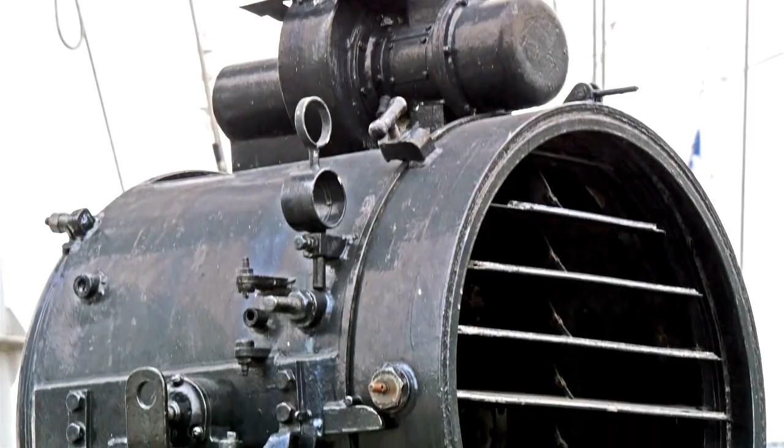Elon Musk just announced one of the most audacious industrial goals in human history, and no, it's not colonizing Mars, at least not directly. SpaceX is aiming to build 115 Raptor 3 engines every single day. That's 3,500 a month. A staggering 42,000 engines per year. Take a moment and let that sink in.

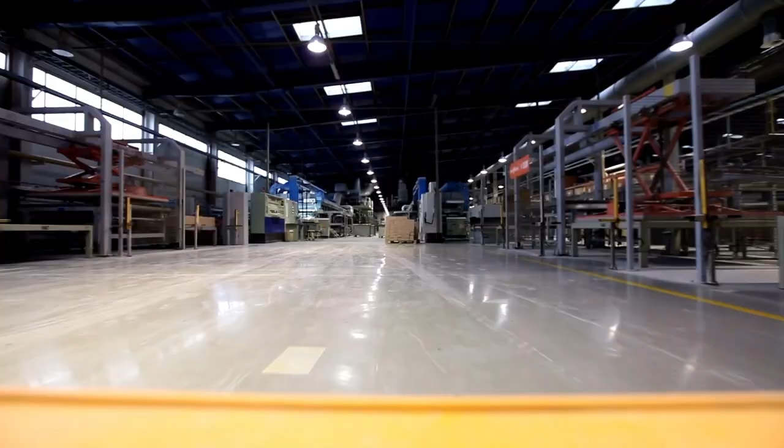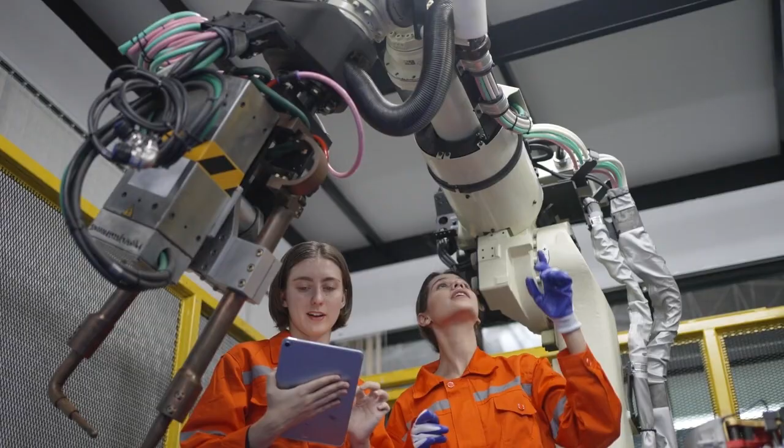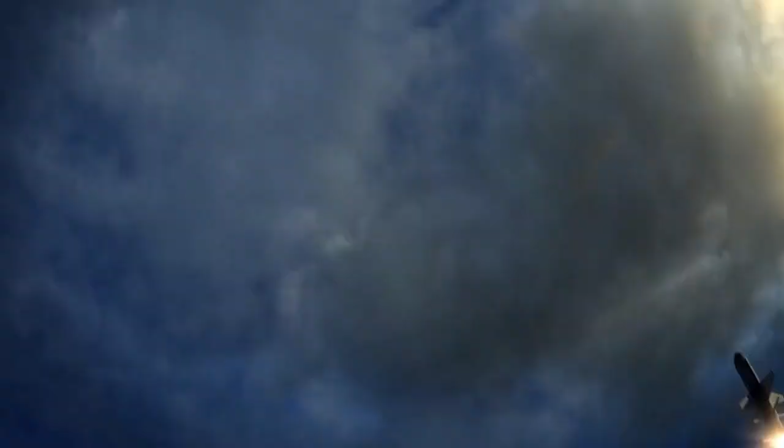It means moving beyond the age of custom-built rockets and into an era of industrialized spaceflight, where interplanetary transport vehicles are built in numbers rivaling commercial aircraft. The vision is staggering, and it demands a level of manufacturing power that not even Boeing, Airbus, or NASA have attempted. It begs the question, how in the world does SpaceX expect to make it happen? Can this goal become reality within the next 5 to 10 years? Or is this another one of Musk's famously optimistic timelines?

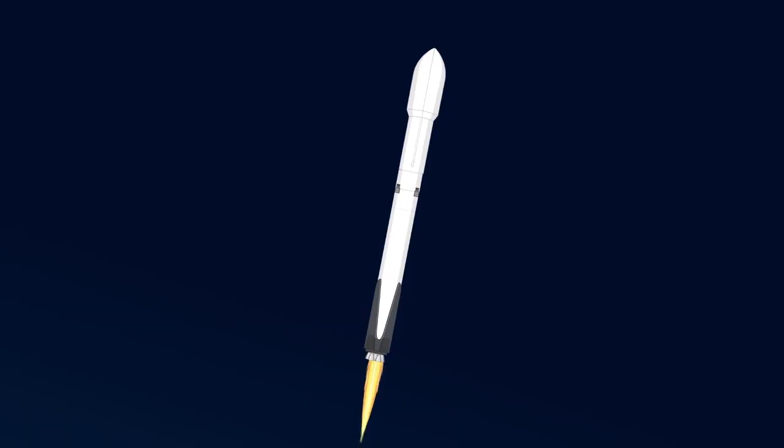To answer that, we need to look at what SpaceX just revealed, a radically redesigned version of their iconic rocket. It's called the Next Generation Starship, or Next Gen Starship for short. While it stands only about 2 meters taller than its current counterpart, it's packed with upgrades that hint at how serious this ramp-up really is. For starters, the basic layout remains familiar. 6 engines on the Starship upper stage and 33 engines on the Super Heavy booster.

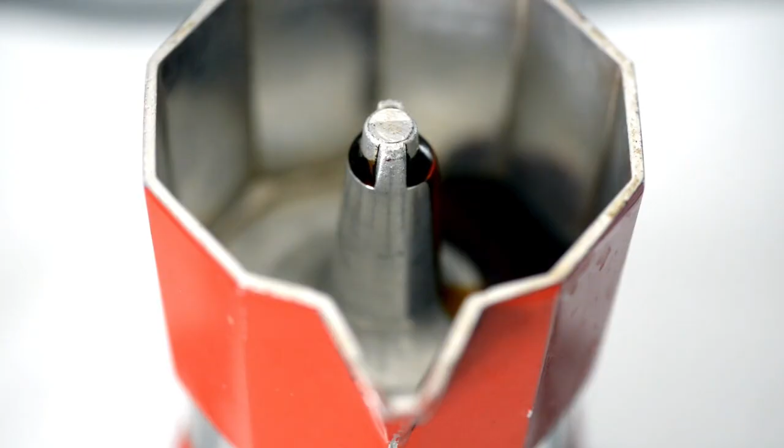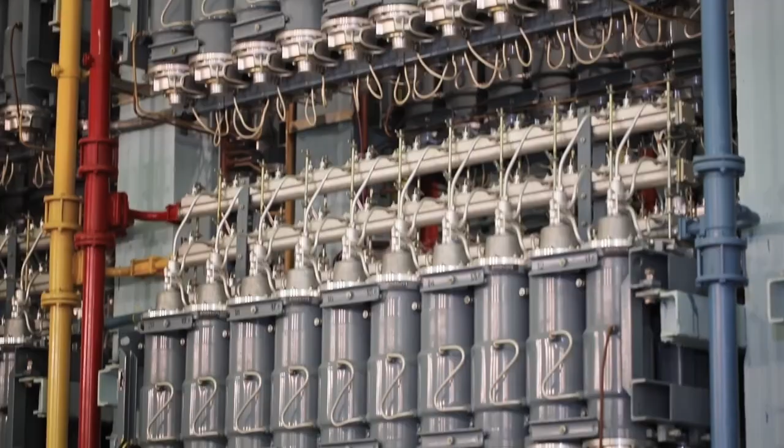But the story doesn't end there. This new version now includes 9 engines on the ship itself, 3 sea-level Raptors and 6 vacuum-optimized Raptors, all of them from the upgraded Raptor 3 line. Gone is the mythical version 3 Starship we used to speculate about, the rumored 150-meter-tall monster rocket. Instead, we're looking at a real, measurable spacecraft, 142 meters tall when fully stacked. The booster comes in at 81 meters, and the Starship stage measures 62 meters. It's leaner, smarter, and clearly built with mass production in mind.

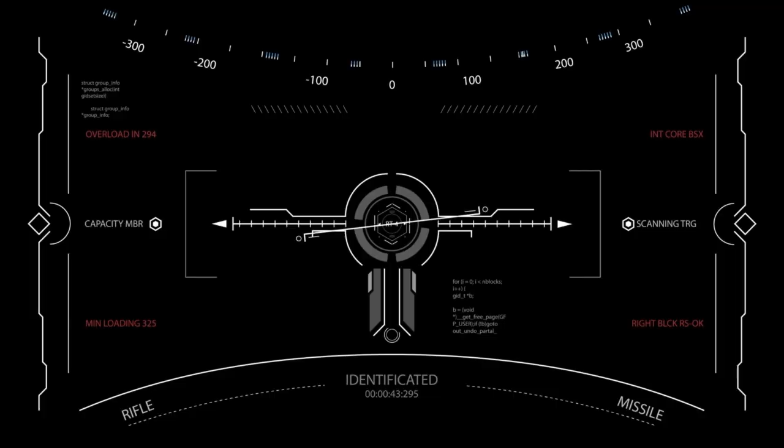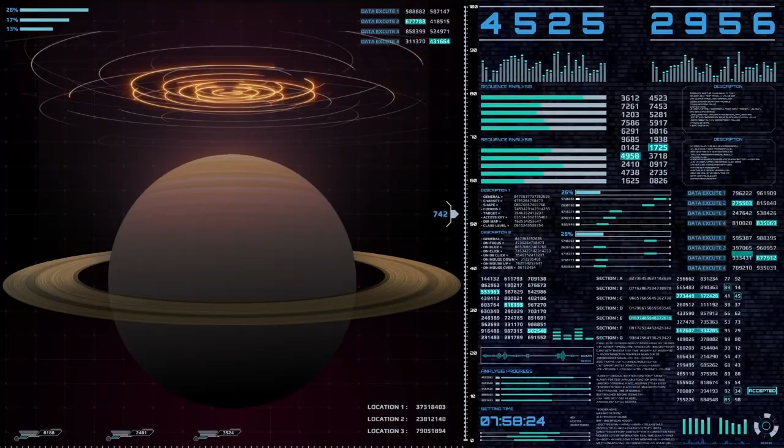Musk's updated goal of producing 3 complete Starships per day would require an output of 117 engines per day. That's a mind-bending leap from current production levels and highlights how essential it is for SpaceX to perfect its engine manufacturing process. At the heart of this transformation is the Raptor 3 engine, a complete redesign from the earlier Raptor 2. Currently, these engines are being developed and tested at SpaceX's McGregor facility in Texas, about 450 miles from Starbase. The company hasn't released official production numbers, but based on facility activity and leaked imagery, estimates suggest they're making perhaps 4 Raptor 3 engines per month.

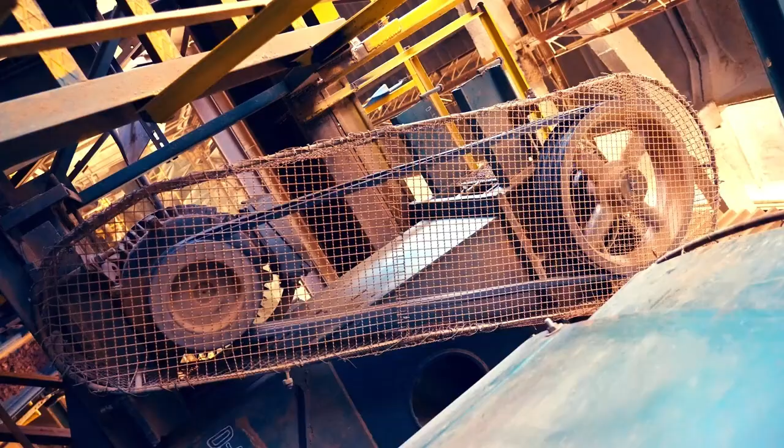Let's pause and compare. 4 per month versus 117 per day. That's not just a production increase, it's a tectonic shift in capability. So, how do you go from boutique hand-assembled rocket engines to building more than 40,000 per year? It starts with a complete overhaul in design philosophy. The Raptor 3 isn't just a beefed-up version of the Raptor 2, it's a reimagined machine built for scale.

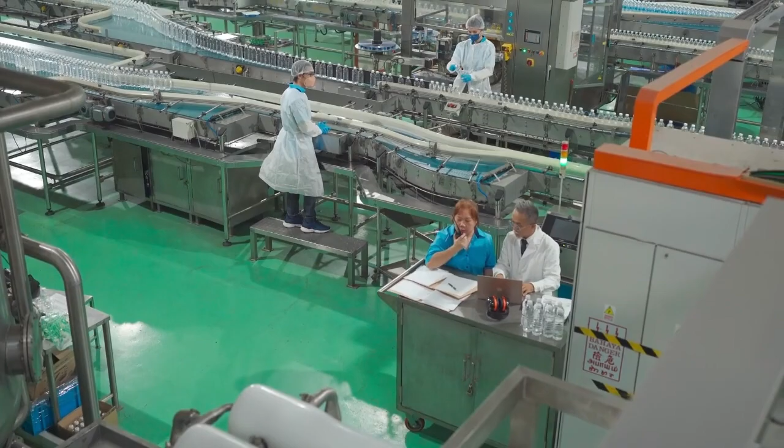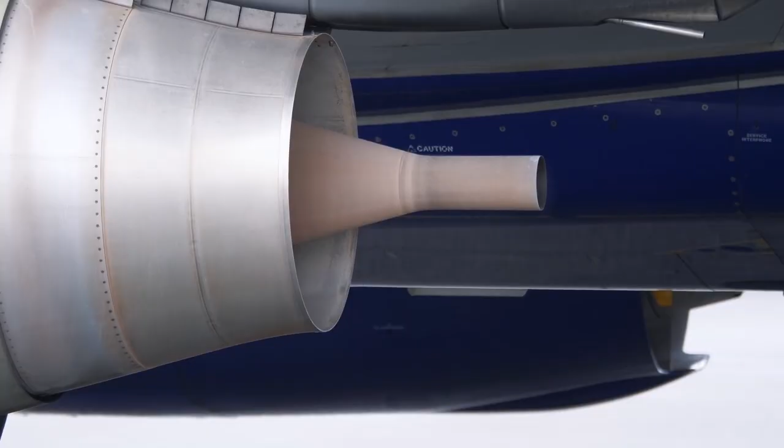We're talking about 280 tons of thrust, up 22% from its predecessor. The combustion chamber pressure reaches a staggering 350 bar, far exceeding any current operational engine on Earth. And despite that power, it's lighter, just 1,525 kilograms, giving it one of the highest thrust-to-weight ratios ever seen. Even more impressive is how they're engineering it for safety and simplicity. For example, the cooling channels that used to be separate components are now integrated directly into the engine body. This eliminates the need for bulky heat shields, reducing weight and points of failure.

And here's where it gets really clever. If a minor fuel leak occurs, the escaping propellant vents into the combustion stream and harmlessly burns away. No explosions. No mission-ending failures. It's a level of redundancy and foresight that feels like it was plucked from a Star Trek engineering manual.

And these engines aren't just being tested once and crossed off a list. Elon Musk confirmed that over 300 hot fire tests have already been performed, racking up more than 16,000 cumulative hours of burn time. That's not just trial and error. It's systematic, data-driven iteration at a scale few other companies can match.

SpaceX isn't treating the Raptor 3 as a finished product either. They're using every test to learn, adjust, and refine, building the foundation for an engine that isn't just powerful but reliable enough to build en masse.

But even with the design perfected, mass production is an entirely different beast. Right now, McGregor is operating like a bespoke workshop, building engines one at a time, each one meticulously assembled by specialized teams. There's a team for material processing, another for the engine bell, others for the fuel channels, and still more for the turbo pumps, ignition systems, and exhaust plumbing.

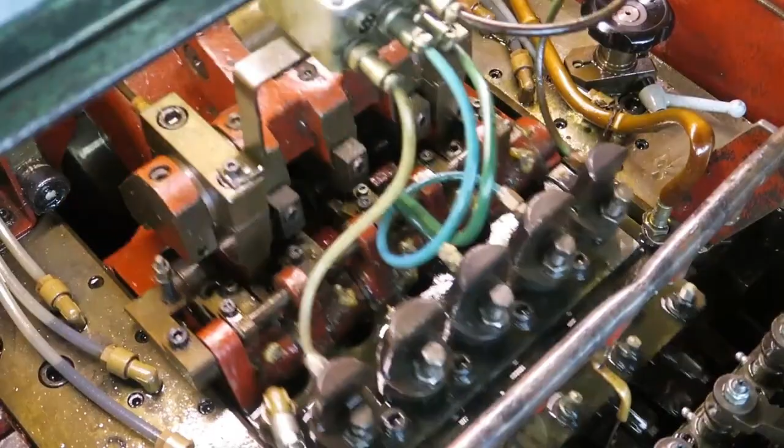Each part is carefully machined and fitted using high-performance superalloys like Inconel, capable of surviving temperatures north of 5,000 degrees Fahrenheit and pressures up to 120,000 psi. It's not just manufacturing, it's metallurgy, fluid dynamics, and combustion science all rolled into one. That level of precision can't just be scaled linearly. You can't just throw 100 more engineers at the problem and expect 100 times the output.

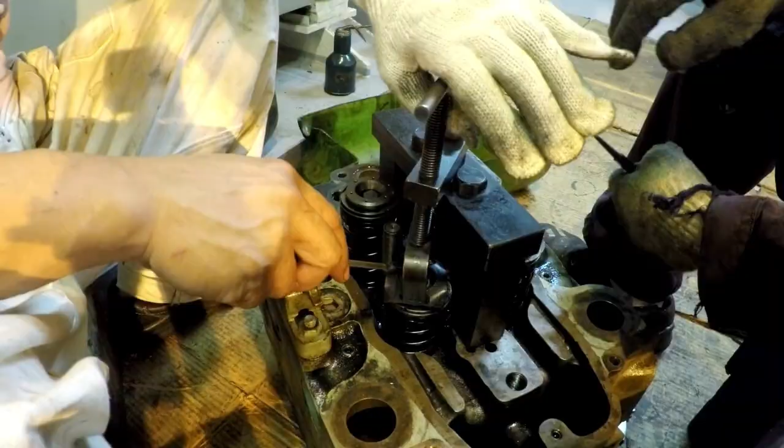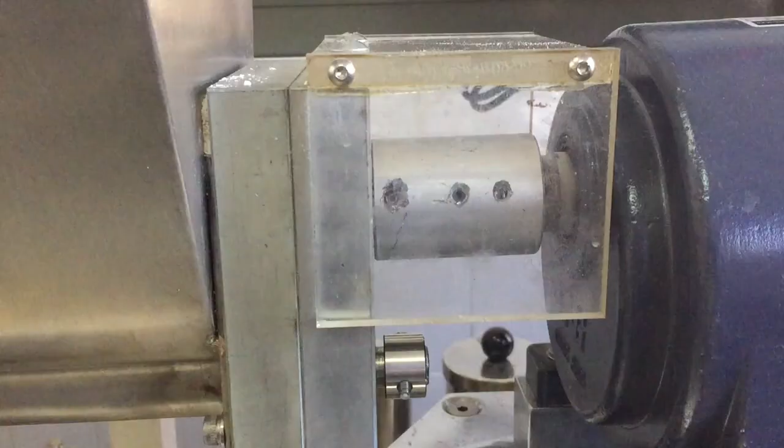What SpaceX needs is automation, modularity, and an assembly line approach that's never been tried before in rocket production. Think about how Henry Ford revolutionized car manufacturing, not by building better cars but by building them differently. SpaceX is trying to do the same thing for engines. Their long-term goal is to move from heavy, bolted flanges and one-off castings to additive manufacturing, seamless welds, and robotic assembly systems. In short, the next leap isn't just technological, it's philosophical.

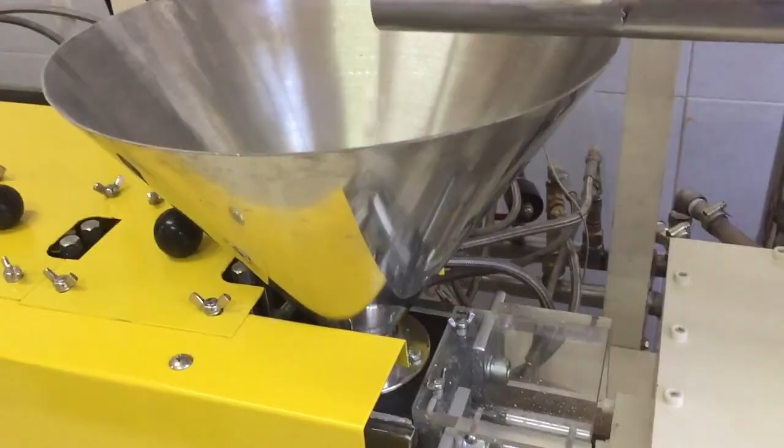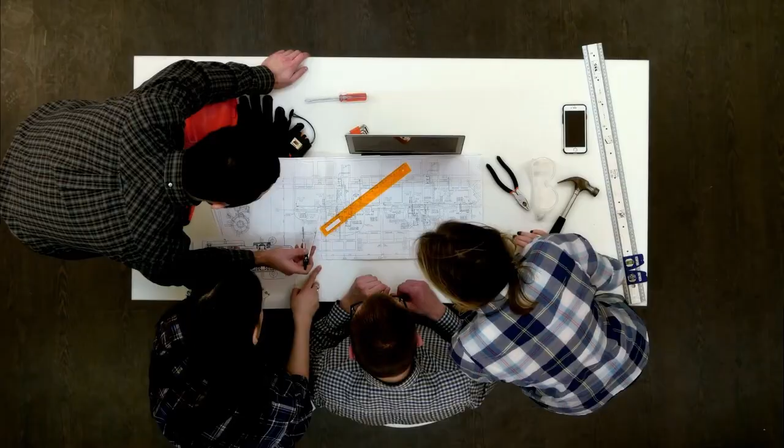But here's what makes this truly ambitious. They're trying to do all of this while continuing live test flights, launching payloads, and preparing for lunar and Mars missions. They're building the engine of the future while still actively flying today's version. That's like redesigning a jet engine while flying the plane. Every success gives them data. Every failure becomes a case study. They're evolving in real time, turning lessons into improvements and improvements into scalability.

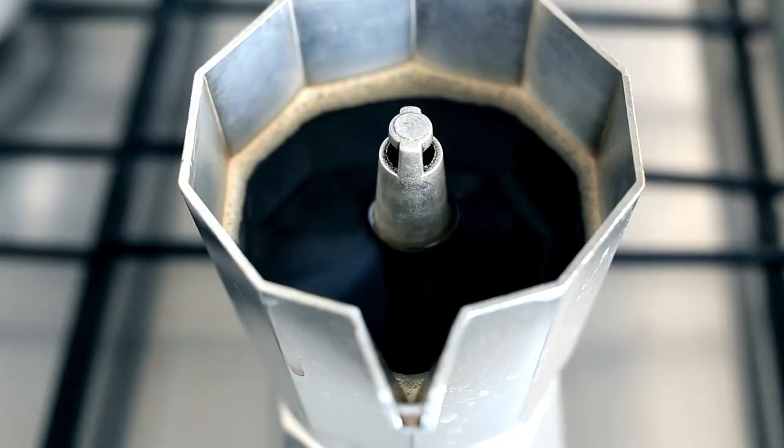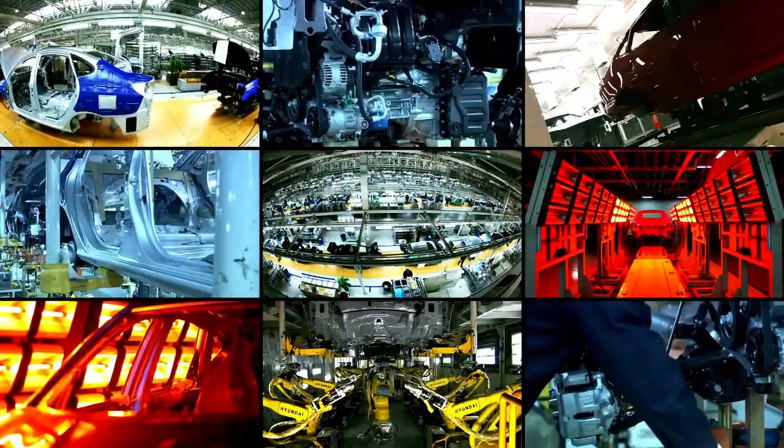And yet, if there's one company on Earth capable of pulling this off, it's SpaceX. They've already shown the world that reusable rockets aren't just possible, they're practical. They took an industry where launching a rocket once was a triumph and made it look routine. Now they're setting their sights on the next impossible goal, making rocket engines as common as jet turbines. If they succeed, it won't just be a manufacturing milestone, it will change how we access space, how we build colonies on other planets, and how we define what's possible for the future of humanity.

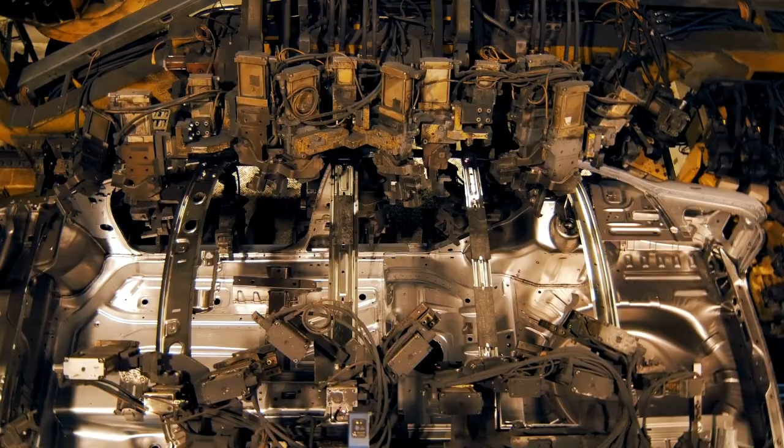Because at the end of the day, this isn't just about engines. It's about building the backbone of an interplanetary civilization. Every Raptor 3 that rolls off that line represents a step closer to Mars, to the Moon, to deep space habitats and commercial spaceports. It's not just a machine, it's a movement. And in Part 2 we'll explore the next stage, the facilities, the supply chain, the workforce, and the broader implications of mass-producing these powerful engines, not just for SpaceX but for the future of space travel itself.

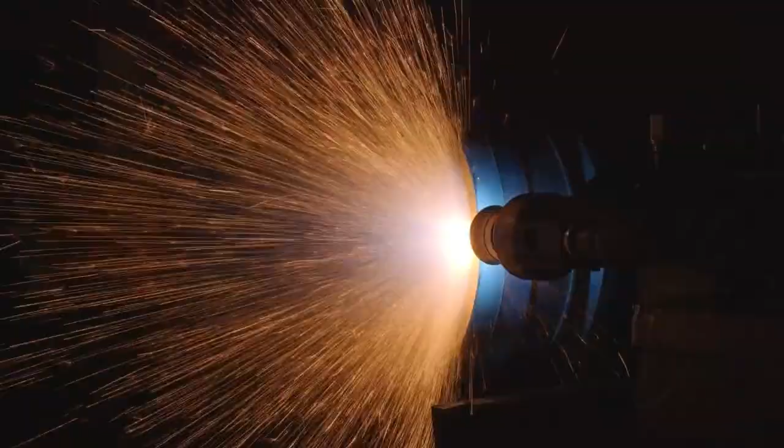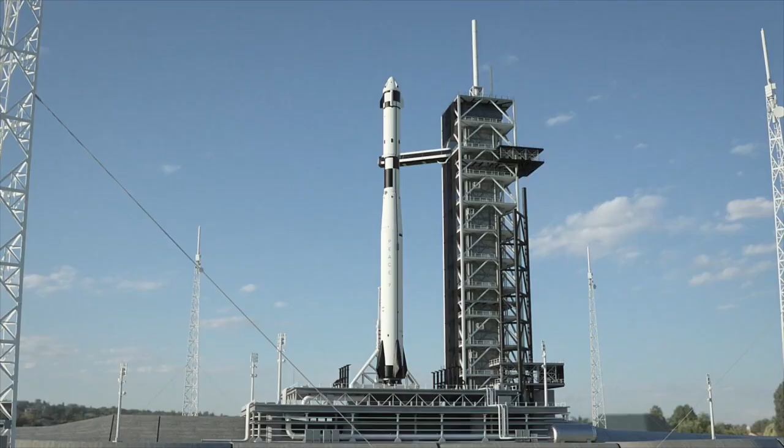SpaceX has worked hard to eliminate as many of those old flanges and mechanical fittings as possible, replacing them with sleek, laser-welded joints. Laser welding offers cleaner, more reliable seams that can handle extreme environments. Because when you're dealing with engines that face brutal heat, insane pressures, and bone-rattling vibrations, any traditional thread or gasket becomes a point of weakness. And that weakness can spell disaster.

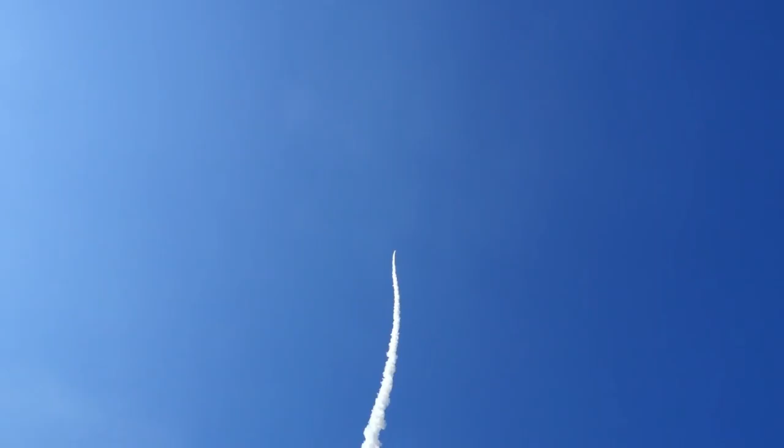Earlier versions of the Raptor engine struggled with this exact problem. Sealing those engines tight was an engineering nightmare and leaks were constant. But now, with Raptor 3, SpaceX claims that problem has finally been resolved. The design is more consolidated, more robust, and far more leak-resistant than ever before.

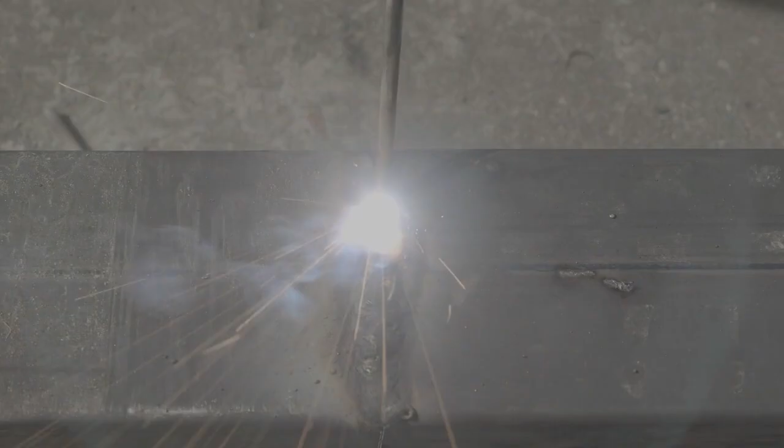Still, not everything can be laser welded. There are places where 3D printing becomes essential, especially in the regenerative cooling channels inside the nozzle and combustion chamber. These internal pathways circulate cryogenic fuel to absorb heat and keep the engine from melting itself during operation.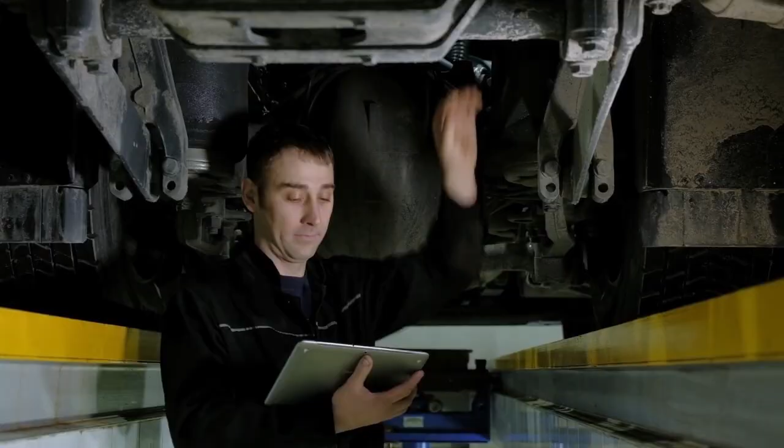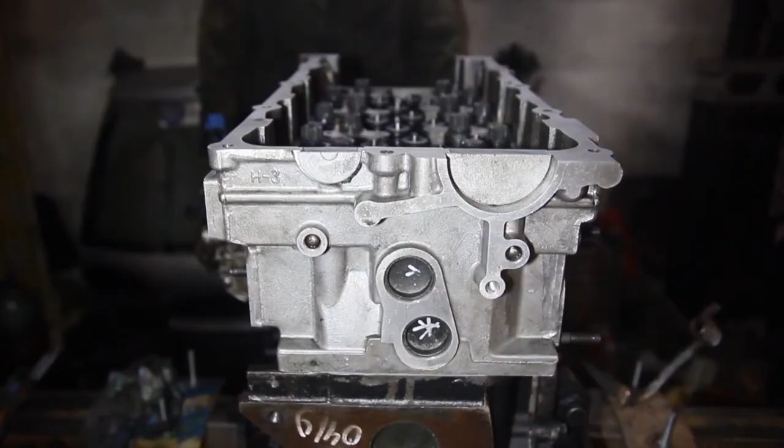They're intricate, twisting, and nearly impossible to build using traditional manufacturing methods. That's where 3D printing shines. It allows SpaceX to create those ultra-complex geometries in a single piece, boosting both durability and performance. And that's part of why the Raptor 3 looks so much more compact and refined compared to its predecessors. It's not just an aesthetic choice. It's the result of radical simplification.

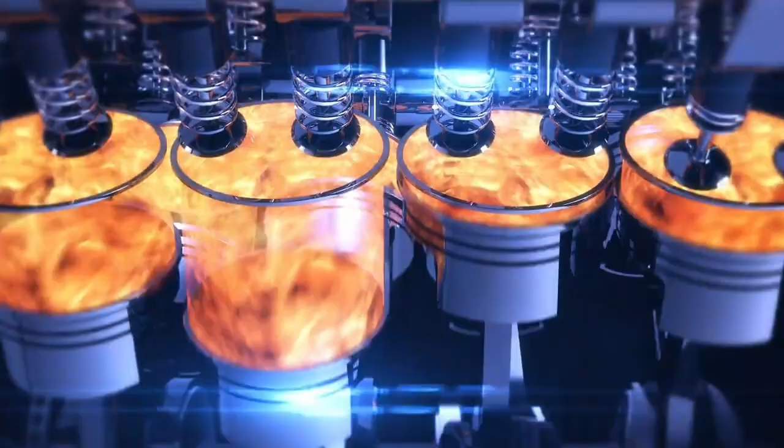According to leaked details and analysis from industry experts, the Raptor 3 is built around three primary modules: the thrust structure, which houses the interface with the liquid oxygen tank; the turbo pump assembly, which forces fuel and oxidizer into the combustion chamber at incredible pressures; and of course, the combustion chamber itself, where the magic, or the controlled explosion, happens.

These modules can be manufactured either through advanced 3D printing or by machining single integrated parts, drastically reducing the number of welds and potential failure points. That change alone increases the engine's structural integrity while allowing mass production to move faster. But 3D printing isn't the golden ticket for everything. While it's powerful, it's also slow and still more expensive than other fabrication methods when you're aiming for scale. So SpaceX is focused on finding the right balance. The mission now is clear: slash cost and boost speed.

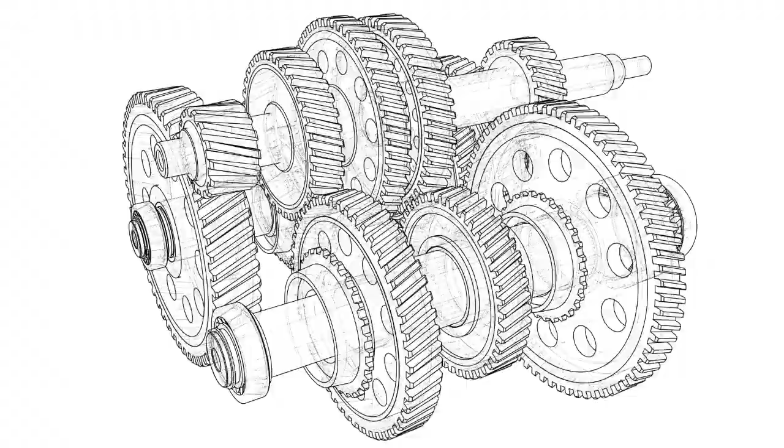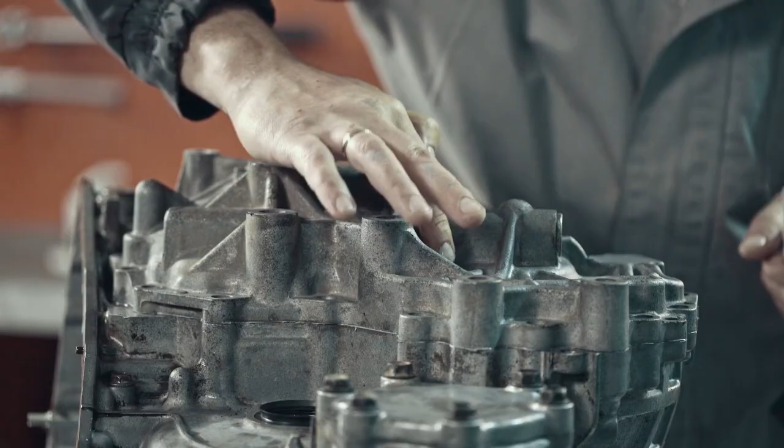Elon Musk has publicly stated his ultimate target is to get the cost per ton of thrust under $1000. That would mean each Raptor engine has to be built for less than $250,000. Compare that to the current price tag, still estimated to be around $2 million each, and it sounds almost impossible. But SpaceX believes they can get there, especially if they reach their dream output, 126 engines per day. At that level of production, economies of scale begin to kick in hard.

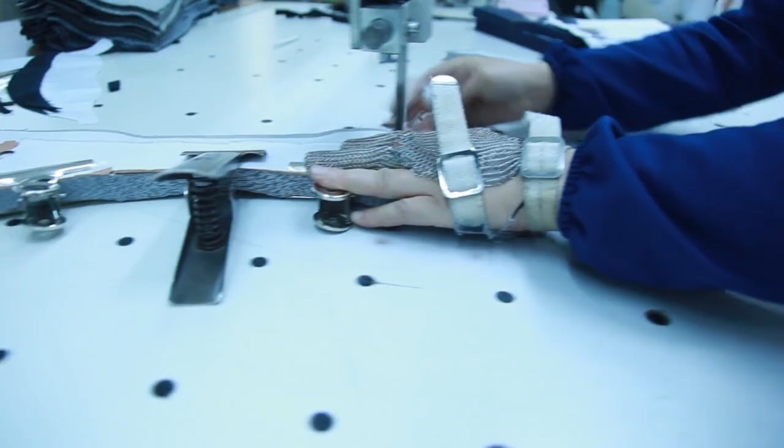The per unit cost could drop dramatically, maybe to $500,000 per engine, or even down to the $200,000 range. But even at that point, the math gets mind-boggling. At $200K apiece, building 126 engines a day means spending over $25 million every single day. That's a $9 billion annual engine budget. And that's just for propulsion. It doesn't even begin to include boosters, tankers, crew cabins, heat shields, or guidance systems.

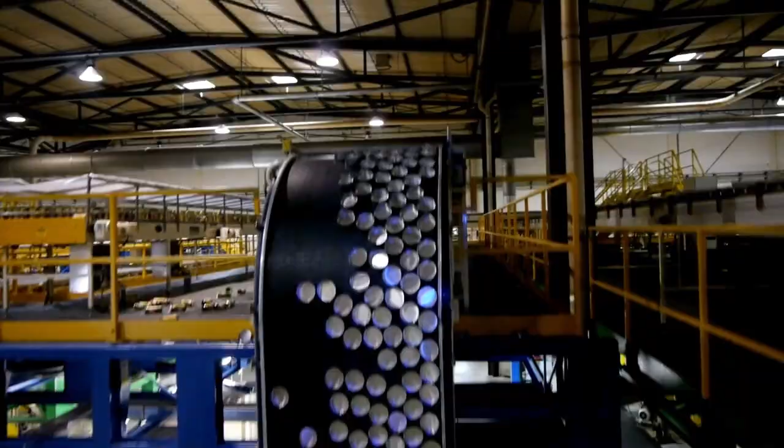And if Musk really wants to ramp to triple-digit daily production, SpaceX will need more than just dreams. They'll need serious real estate. That's why insiders believe at least 5 more production facilities will need to be brought online to support the scale-up. And these aren't just assembly buildings. They'll require testing bays, materials pipelines, precision machining setups, cryogenic storage, engine stands, and transportation systems to ferry completed Raptors straight to launch complexes. You can't build that kind of infrastructure overnight. And you can't do it just anywhere.

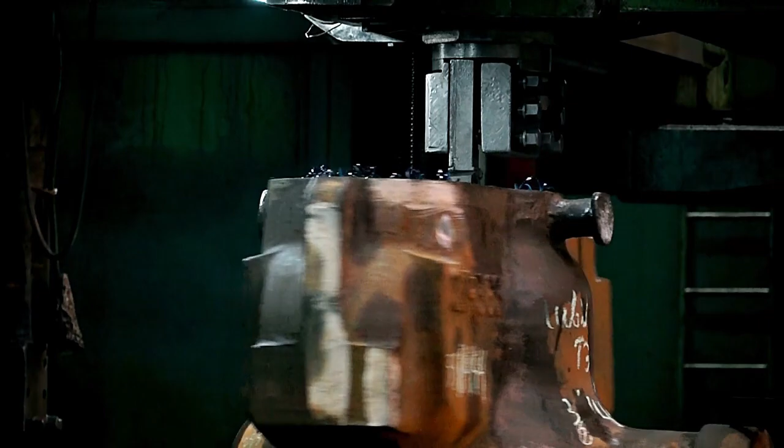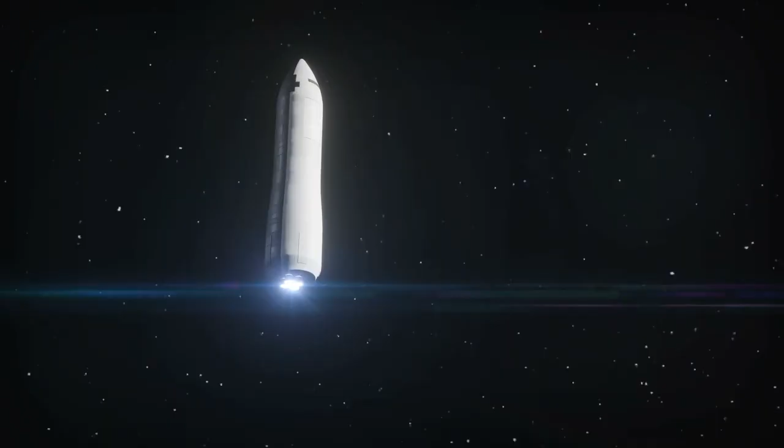That's why SpaceX is eyeing expansion primarily in Texas and Florida. These states offer proximity to existing infrastructure, ocean access, and, perhaps most importantly, a business environment that's far more favorable than what California has to offer. Let's be honest, California probably isn't on SpaceX's roadmap anymore. The political climate and economic friction there, especially with figures like Governor Gavin Newsom, has created a lot of tension. Add to that California's notoriously high taxes and strict regulatory hurdles, and it just doesn't make sense.

For a company laser-focused on rapid iteration and cutting-edge manufacturing, time lost is money lost. Every delay or bureaucratic slowdown eats into that goal of making humanity multiplanetary. So Texas and Florida it is. And it's not just about making engines anymore. Elon Musk has stated openly that he wants SpaceX to build 3 starships per day. That's an absolutely insane target by aerospace standards. And yet, it's not impossible.

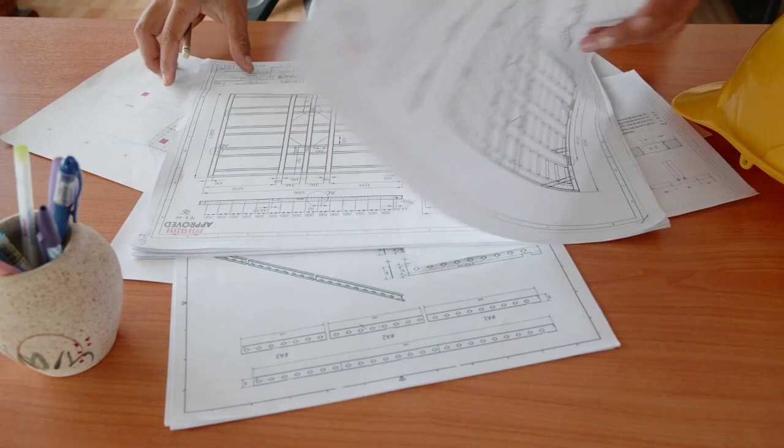If each facility could eventually build a starship every 3 days, then scaling up to 3 per day across a few locations becomes feasible. But building starships at that rate also creates a new problem. Where do you even put them? These vehicles are nearly 400 feet tall when stacked with their booster. They don't fit in a parking garage. Heck, they barely fit on the roads. That means SpaceX will need huge amounts of land just to store, outfit, and launch these massive machines.

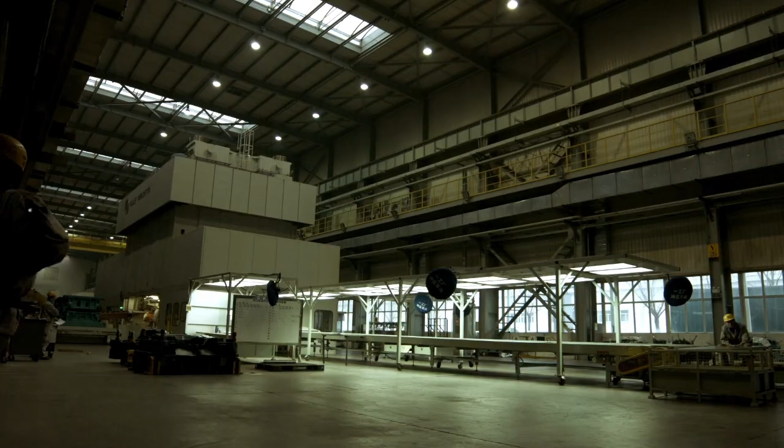And then there's cost again. Housing in California is already outrageously expensive. Now imagine trying to store, maintain, and launch literal skyscrapers made of stainless steel from the same region. The economics just don't work.

That's why SpaceX's expansion is leaning into areas with open land, lower taxes, and direct ocean access for launches. That's where the future is taking shape, in Boca Chica and Cape Canaveral. But here's the thing, SpaceX actually can afford this. The company is bringing in serious money.

According to Musk, SpaceX's commercial space revenue is expected to exceed NASA's entire budget next year. Think about that. NASA's entire budget for 2025 will be around $25 billion. And SpaceX is closing in on that mark just through launch contracts, Starlink subscriptions, and satellite deployments.

This year alone, SpaceX is projected to earn about $15.5 billion. Of that, only $1.1 billion is coming from NASA. The rest is pure private sector hustle, telecom deals, commercial launches, defense contracts, and expanding Starlink internet across the globe.

But to build the kind of future Musk envisions, to make Mars not just reachable but livable, they'll need to push further. Building over 100 Raptor engines per day won't happen overnight. Even with SpaceX's warp speed engineering culture, we're probably 5 years away from hitting that number.

For now, they're focused on getting their second major Starship factory online in Florida. Combined with the original site in Texas, these 2 mega facilities are just the beginning. Once both are operational, they'll be capable of producing a full Starship roughly every 3 days. But the real goal is far more ambitious: 1 Starship per day by the year 2030.

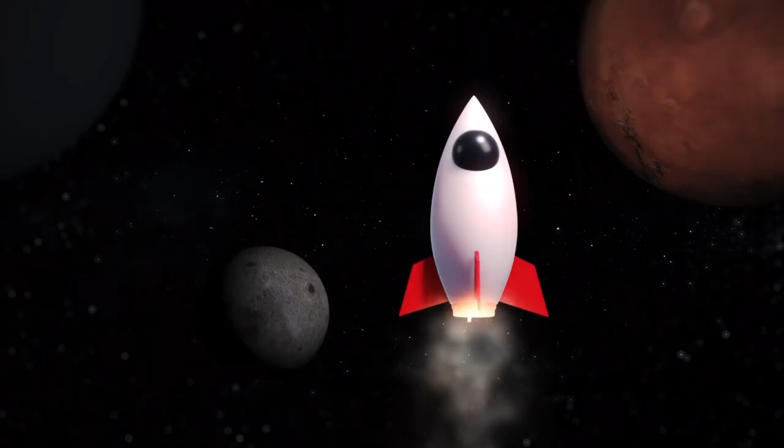And to support that, Musk wants to scale Starship manufacturing to the same level as Boeing and Airbus build airplanes. That's not a metaphor, that's the actual target. Boeing and Airbus each produce hundreds of jets per year, and Starships are bigger than any of them. Even the mighty A380 looks small next to a full-stack Starship.

But SpaceX plans to match that level of output, because to build a self-sustaining city on Mars, you'll need thousands of launches. Not dozens. Not hundreds. Thousands. That also includes building out the communication infrastructure to support life on another planet.

Right now, SpaceX produces about 5,000 Starlink V3 satellites per year. These newer models are roughly the size of a Boeing 737. They're huge compared to the earlier versions and pack far more power. The goal is to double that production rate to nearly 10,000 satellites per year. That might sound like overkill, but it's not.

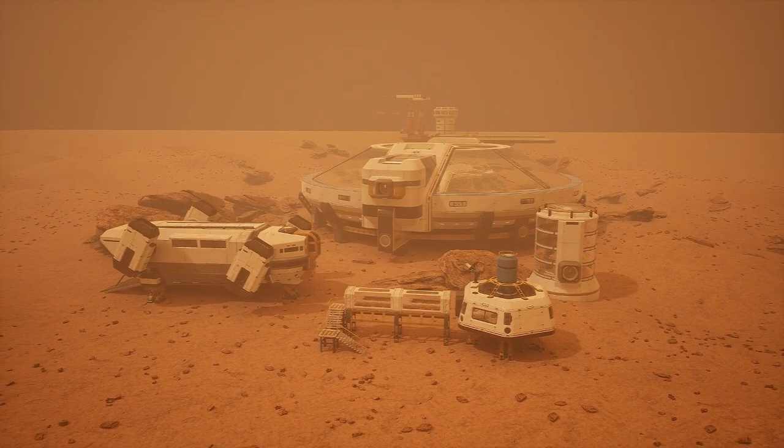To build a data bridge between Earth and Mars, you'll need redundancy, low latency, and global coverage, plus a whole network around Mars itself. All of this builds toward Musk's roadmap for Mars. By 2026, the plan is to send 5 Starships to the Red Planet. Each one will carry about 10 tons of equipment.

That early wave is just to test the waters, to prove they can get there, land safely, and communicate back home. From there, things escalate quickly. In the 2028 to 2029 window, SpaceX wants to send 20 Starships, each delivering around 75 tons of gear. That's when they begin setting up infrastructure, scouting for water, and preparing landing zones.

Then around 2030 to 2031, the real work begins. SpaceX hopes to launch 100 Starships, each carrying 150 tons. At that point, it's no longer about exploration, it's about settlement. They'll be mining local materials, building shelters, laying roads, and generating fuel using Martian resources. This is where the backbone of a functioning outpost starts to emerge.

Finally, in the 2033 window, the boldest step yet, a fleet of 500 landers, each hauling 300 tons. That's 150,000 tons of cargo dropped on Mars in a single launch window. Enough to build habitats, power stations, food production, and autonomous factories. It's the moment Mars begins to become independent.

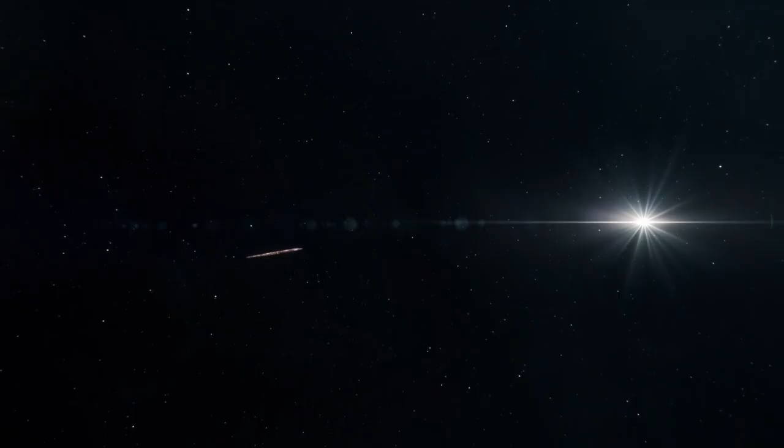That kind of effort, on that kind of timeline, is almost hard to believe. And yes, it will probably take longer than expected. Maybe we won't see real Martian boots on the ground until 2035 or beyond. But that's okay. Because the size of the dream demands patience. And the scale of the ambition demands resolve.

Even if we're still years away from liftoff, what SpaceX is doing right now, today, is laying the foundation. Every Raptor built, every Starship stacked, every launch rehearsed, it's all moving us closer to that distant red world. And maybe, just maybe, Starship Flight 10 will be the spark that proves this insane vision is possible. The rocket that whispers to humanity, this isn't science fiction anymore. This is just the beginning.